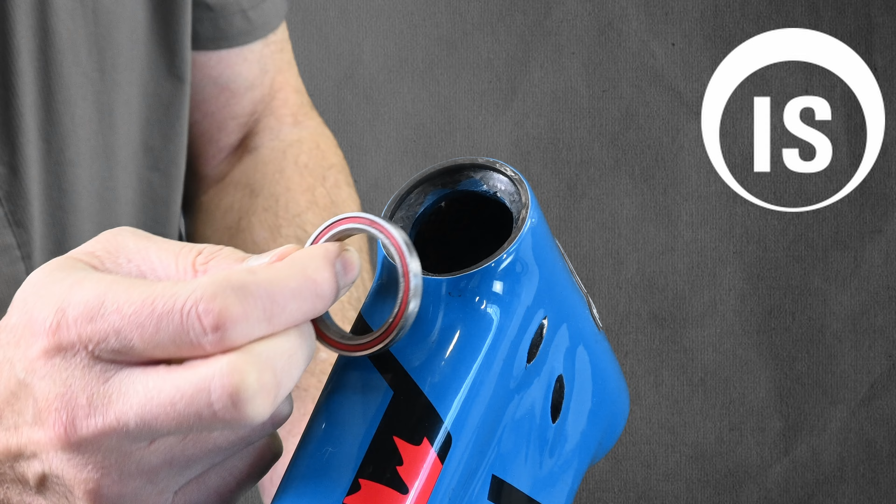First thing to do is remove the headset. On IS bikes, this is really quite easy. Remove the top cap, the stem, the spacers, and the fork.

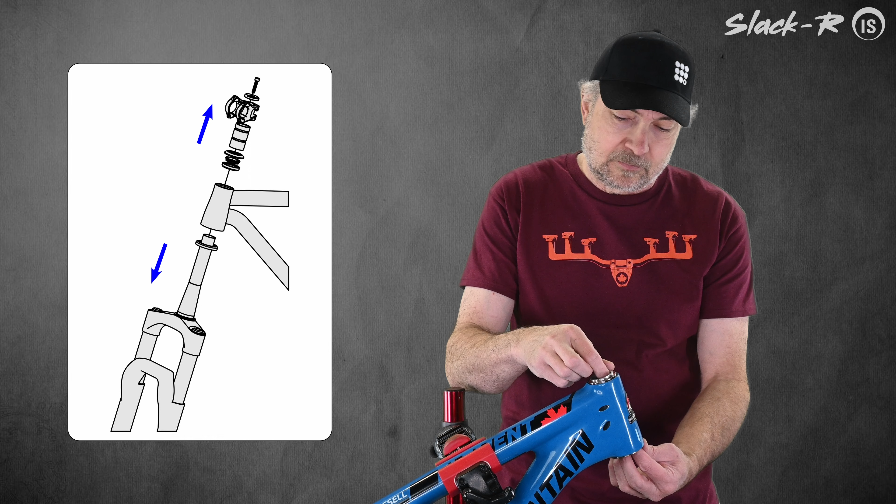Remove the bearings and the compression ring. You're going to reuse your bearings and all the other parts, so clean and inspect them now and order replacements if necessary. Clean the bearing seats and the frame thoroughly.

The new Slack-R cups need to sit down into the frame. They nest on the bearing seats in the frame. But some frames have overly narrow throat dimension, like this Rocky Mountain does.

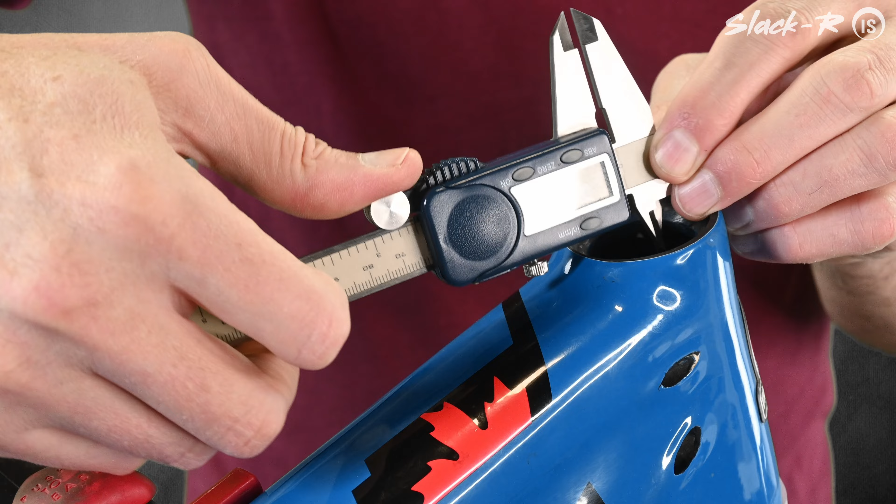Notice that the throat is only 33 millimeters and the Slack-R top cup needs 34.5 millimeters. It's pretty easy to sand this out a little to get the Slack-R to fit. This procedure works with both carbon and aluminum frames and does not affect the strength of the frame.

We've taped a shop vac nozzle to the frame to control carbon dust. Carbon dust is particularly dangerous, so wear a mask and eye protection every time.

You can sand it by hand using a cylindrical sanding bar, or you can use a sanding flap disc on a drill. A large diameter sanding drum works even better. Sand, measure, check, repeat.

When the cup will fit, check that it sits all the way down. There should be an even small gap all the way around. That indicates that the cup is properly supported on the bearing seat.

You need to mark the center line of your frame behind the head tube, both on the top and on the bottom. There are a few different ways you can do this. First, I always put some tape over the frame here so I don't mark it.

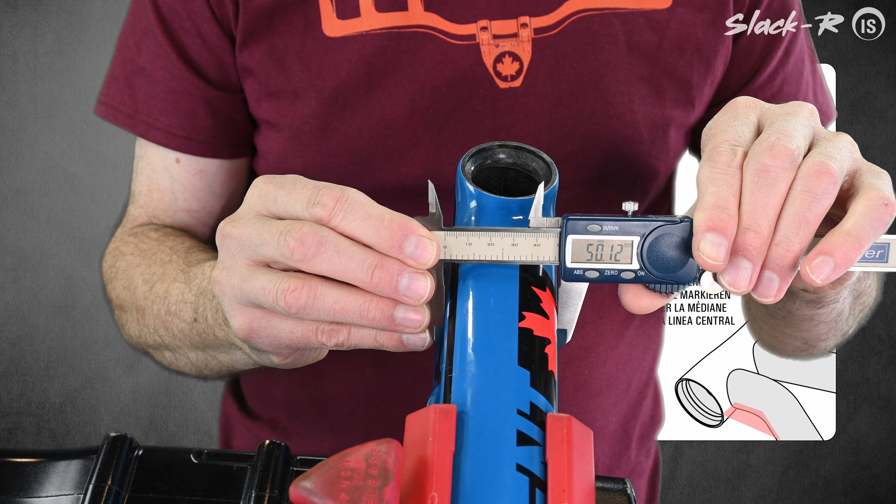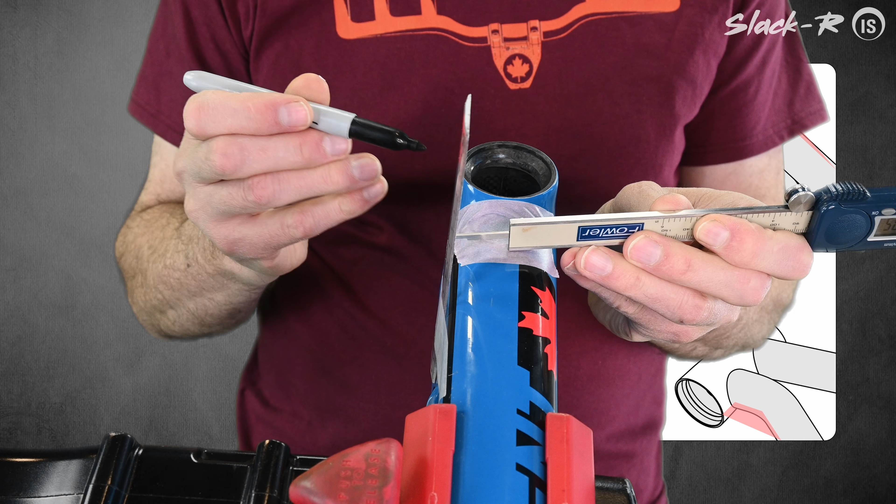You can even eyeball it, but remember, the Slack-R is eccentric, so if you have any error here, it will result in slight angular misalignment left to right of your fork.

Here are the three components of the IS Slack-R. There's an upper cup, a lower cup, and a tensioner. A special tightening spline is also included.

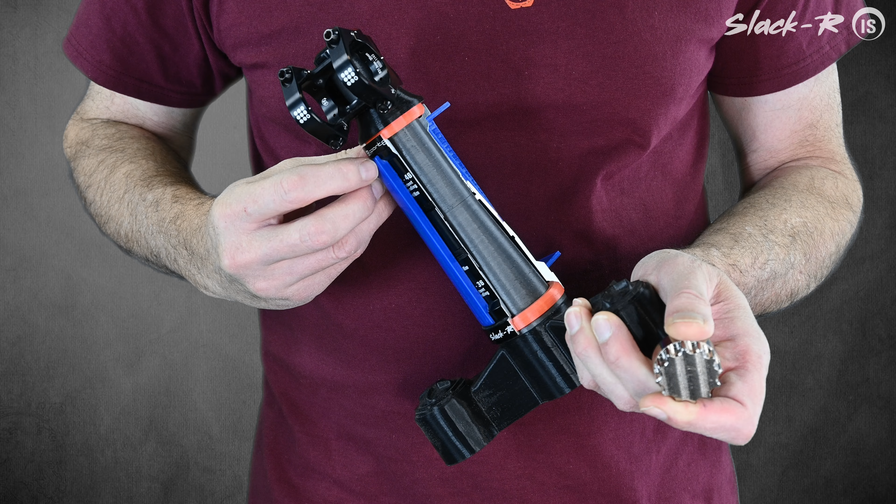More on that later. This section model shows how the tensioner is threaded into both the upper and the lower cups, and it's tightened to securely pull the two cups together and lock them into your frame. Also notice the tapers. These are the seats where the Slack-R cups securely sit on the bike frame bearing seats.

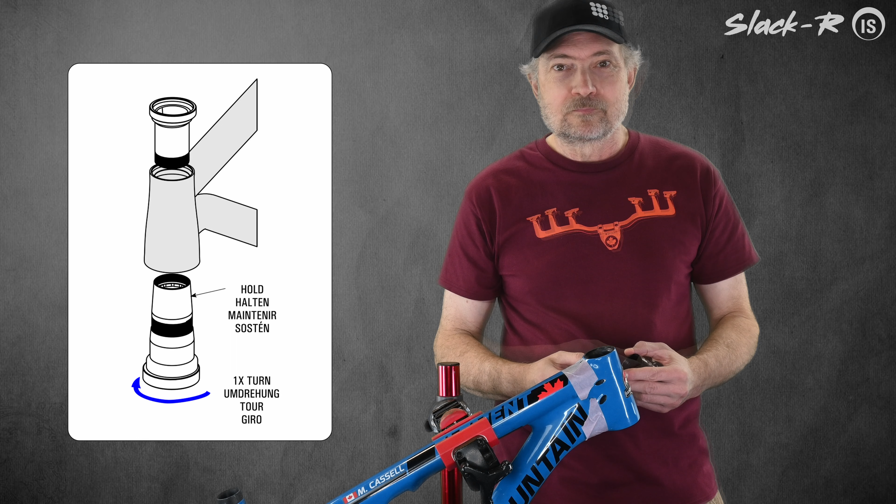Let's first do a dry fit to see how everything goes together. The tensioner has a left-hand thread at the lower large end and a right-hand thread at the upper smaller end.

Start the tensioner one turn only onto the lower cup. Remember, this is left-hand thread.

You want to say this part out loud very dramatically like Sean Connery in The Hunt for Red October. One turn only.

Insert the lower cup with the tensioner into the head tube. You can roughly clock the rotational position with the notch to the frame mark that you made earlier. We will adjust the clock position more accurately later.

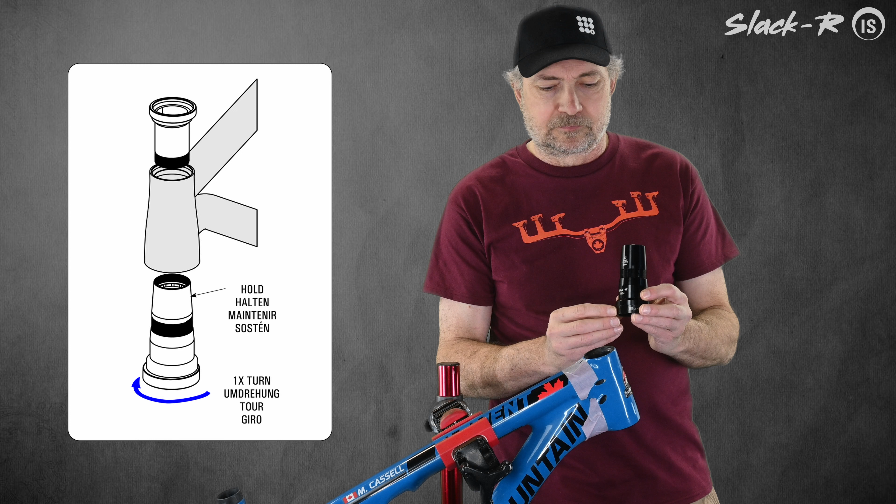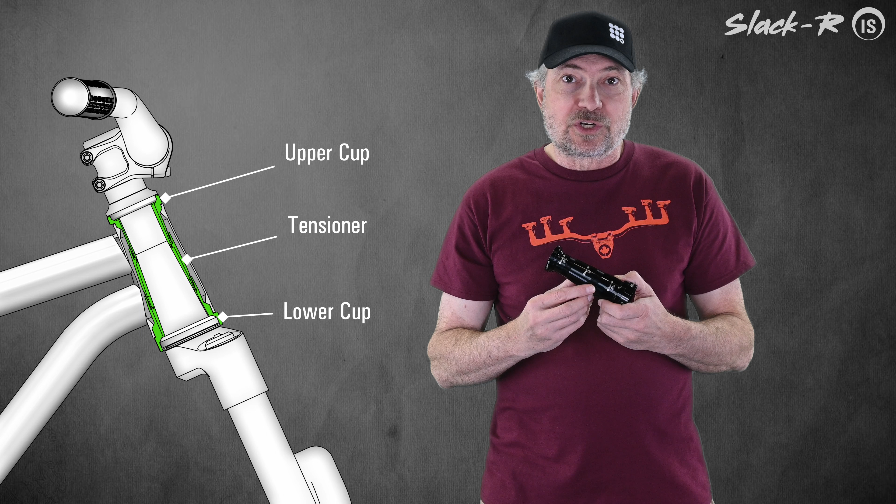Let me demonstrate how the Slack-R tensioner works and why it's so important to only have it started in one turn. Notice how the tensioner pulls both the upper and lower cups together equally as it's tightened. The purpose of doing only one turn, upper and lower, is to ensure that the tensioner is exactly equally engaged into both cups. Otherwise, interference may arise before the entire assembly is securely tightened into the frame.

Continuing with the dry fit. Thread the upper cup in. Again, rough alignment is sufficient, but one turn only.

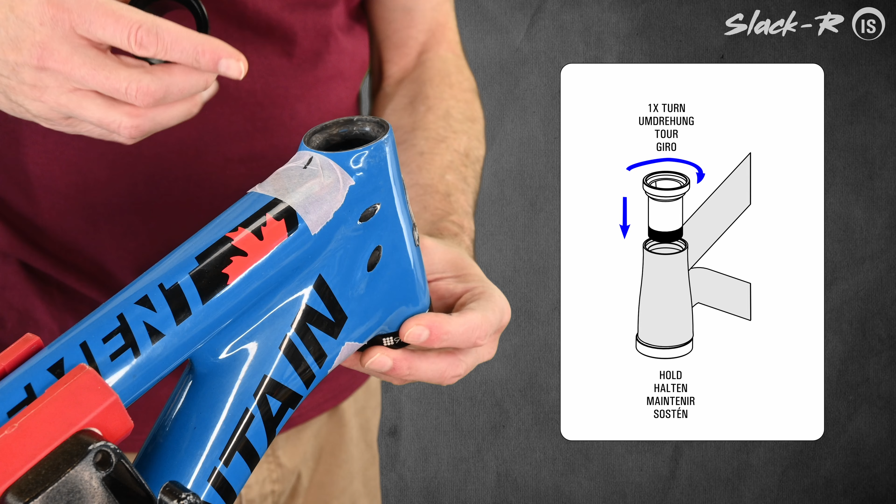Check that the tensioner is not interfering with any protrusions deep inside the head tube. There may be bumps or other protrusions in there that need to be sanded off. There are none in this Rocky Mountain frame. That's lucky.

Use a 19mm socket with extension and the spline tool that comes with your Slack-R and engage the tensioner from below.

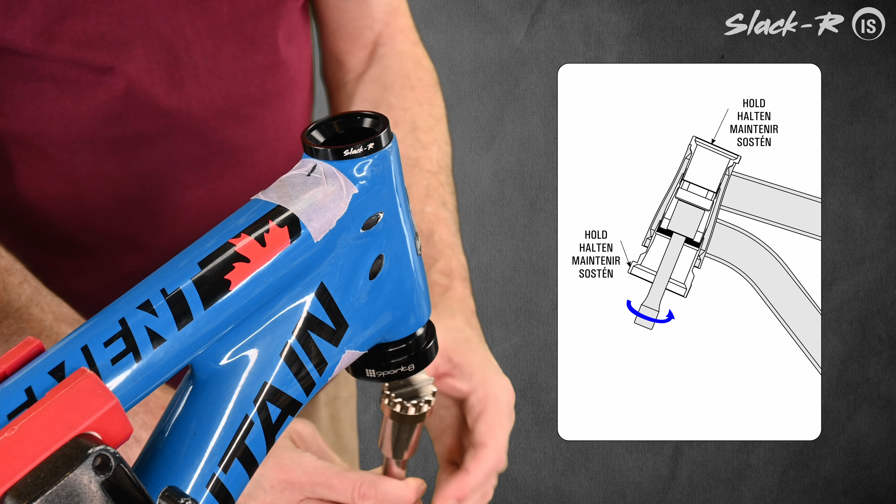Now with one hand hold the driver and with the other hand hold the bike. With your third hand align the upper cup and with your fourth hand align the lower cup. If you don't have four hands like me, get someone to help you with this step. It makes it go much easier.

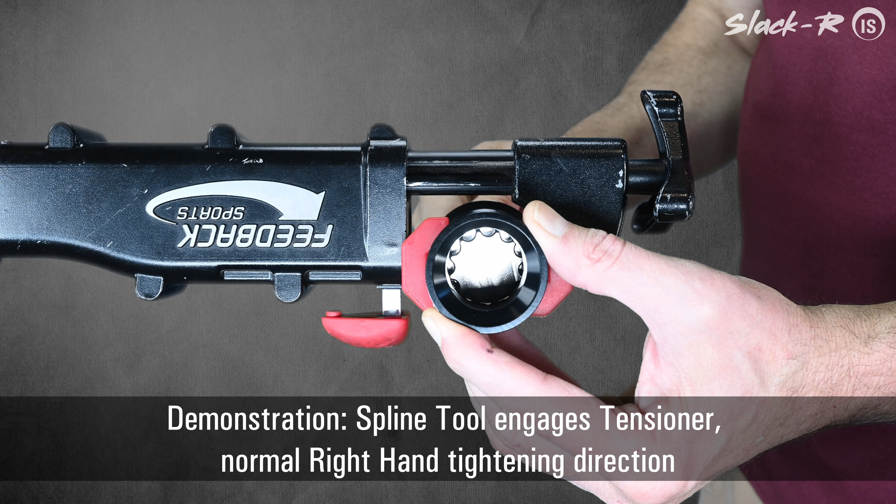Tighten the tensioner in the normal right-hand thread clockwise rotation until the two cups pull together. Do not over-tighten. This is just a dry test fit.

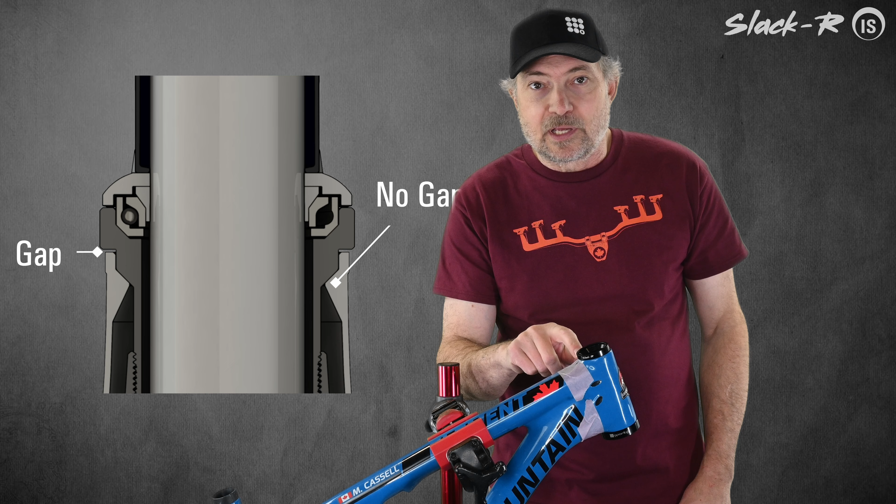Check that there is a small gap between the head tube and the underside of the cups, top and bottom. This gap is good. It is necessary. It ensures that the cups are seated properly on the internal tapers. Now you can disassemble the Slack-R and we'll prepare for the install.

Put a thin, even film of friction paste on your bearing seats. Use friction paste for carbon and aluminum frames.

Put a small line of blue, not red, thread locker on the male Slack-R threads. Do not use too much or it can become very difficult to get these fine, large diameter threads apart in the future.